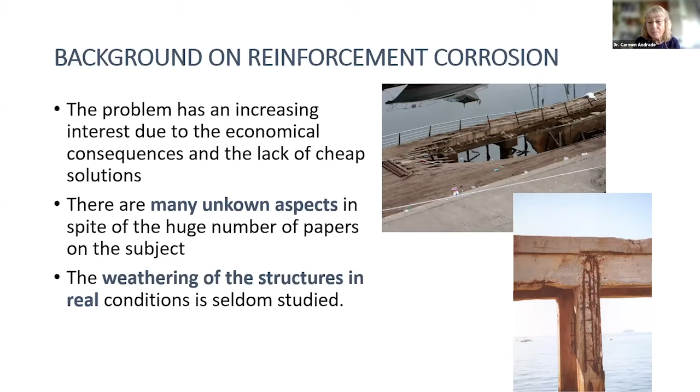Coming back, it has to be mentioned that it was in the 60s or 70s that Pourbaix and Gouda, Monfore, Baumel, Engell, Kaesche, these pioneer people, were studying corrosion. It's not new, despite a lot of young people just dealing with it now. It comes from very, very old, with very good papers at that moment.

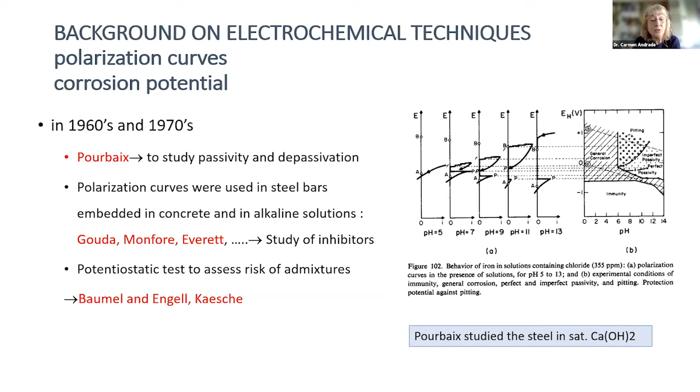They studied it at the beginning through polarization curves, either potentiodynamic, galvanostatic, or potentiostatic, in order to know the concentration of chloride that could develop corrosion.

In my thesis, I was addressing the application of linear polarization resistance, and there I can mention Feliu and Gonzalez, who were also masters of David Bastidas, and who suggested to me to try to apply this to concrete. This is the galvanostat, a handmade galvanostat that we made just for the experiments.

I used 2-meter-long pre-stressed steels, one bar or wire for working and the other for counter, and I was applying galvanostatic pulses in order to see whether the response is linear or not.

In that case, I used different amounts of current and different time steps waiting, in order to realize whether it's linear or not. And it's quasi-linear really. I was plotting the different RP values, and we realized they correlate very well to the state of corrosion of the bars inside these beams, some of which were made with calcium chloride.

After that, we extended this to any kind of media, and we also developed a portable corrosion rate meter together with the people I mentioned before.

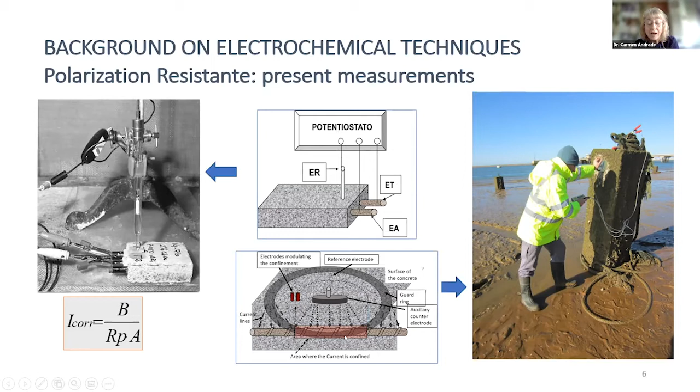We used a guard ring to confine the current inside a certain area, in order to have very well delimited the area that we are polarizing.

At that time, I was starting to apply this to concrete or mortar specimens, changing the amount of water, because aqueous corrosion needs water. We realized we have big changes when we go to 100% relative humidity or partial immersion, and when it dries, the corrosion rate is smaller, and the same happens with the potential.

We stated that the mechanism or control of corrosion in concrete can be an activation control, but also mainly a resistance control. This goes back to very old experiments.

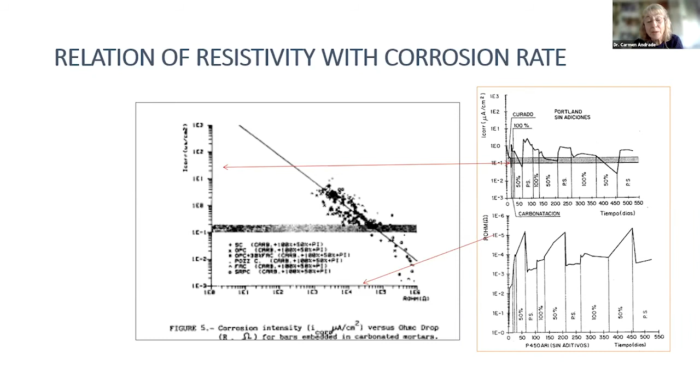We did that in many cases with chlorides and inhibitors, and together with Gonzalez we were able to plot this graph showing corrosion rate versus the ohmic resistance of the mortar. We realized this resistance control we were commenting on, using several types of cements and several types of additions.

We were also stating the levels of corrosion rate you can find as a function of the amount of water in the concrete, and what is passive state. When we have less than 0.1 micron per square centimeter of corrosion, we can say we are in passive state, or the corrosion is negligible because the concrete is dry. The maximum corrosion rate we were able to measure is about 1 millimeter per year.

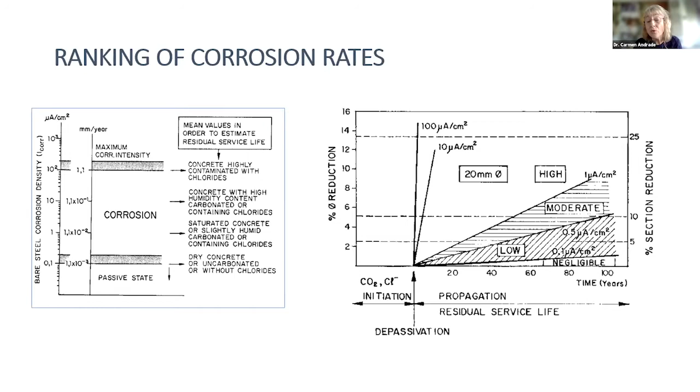We ranked that and applied it to this model, establishing that below 0.1 micron per square centimeter corrosion is negligible, because in 100 years there will be almost no loss in the steel section. We ranked up to 0.5 or 1 micron per square centimeter, and above 1 micron we can consider it very high corrosion, because important loss in the diameter or section of the bar would occur before the 50 years of service life normally considered for buildings. That ranking was made just based on this figure.

But I realized later this is not enough, because all the data were laboratory data. What happens if we expose that to the atmosphere? The values are the same ranking, but the effect of changing natural conditions, the relative humidity and the water, is very different.

I will try to summarize. We made big elements with holes in them where we were measuring the relative humidity. We call it the internal relative humidity, because we measure inside the concrete, in a small cavity, rather than in the atmosphere. We were measuring the corrosion rate with our portable corrosion rate meter, following the potential and corrosion rate, and we realized it changes very much with the climate, with external conditions.

We tried to analyze this further. The relative humidity values plotted here show that externally the humidity is lowering and going up - we have the daily change in relative humidity and the seasonal change in relative humidity. But inside the concrete, the relative humidity is much higher than externally, even during the very dry periods we have in summer in Madrid.

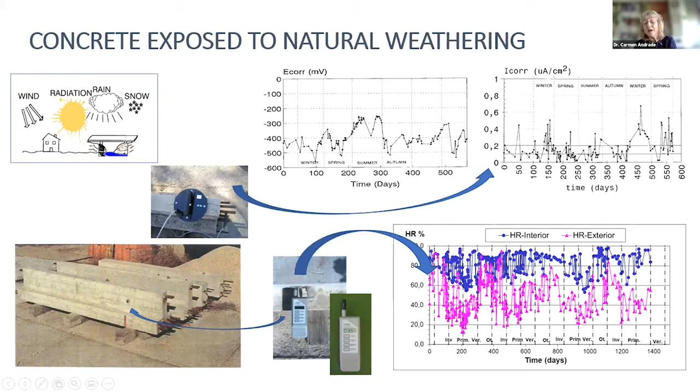When we compared that with the temperature, we realized the humidity moves in an opposite, mirror manner to the external relative humidity. While the temperature inside and outside the concrete is very similar, the relative humidity, as I said, is completely different - it's much wetter inside.

This wasn't the first time this was published, because researchers from Sweden, Fagerlund and others, were also studying this, and they had realized by other means this sponge effect of the concrete. The concrete retains humidity much longer than when drying.

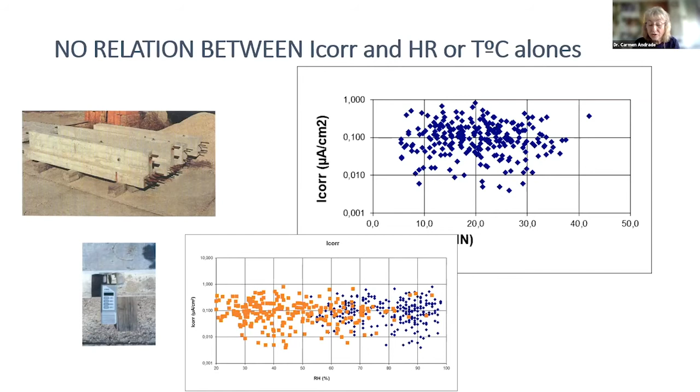When we plotted the corrosion rate versus the internal relative humidity, we didn't find any relation - there is not a direct relation. Also with temperature - this is temperature and this is the relative humidity inside. In that case, it's not the relative humidity that is controlling the corrosion rate, as some people think. No, it's not the relative humidity controlling the corrosion rate.

We produced other kinds of specimens, smaller ones, to handle them much better, with this cavity where we measure internal relative humidity, and we exposed them to different conditions inside the buildings or outside, protected from rain or exposed to rain and also to the sun.

This is a summary of two years of record. Now we have a much longer record, and we were measuring in the atmosphere the relative temperature, the relative humidity, and also the raining regimes, which we noticed is a very key parameter for the relative humidity inside, the amount of rain that is just fed into the concrete.

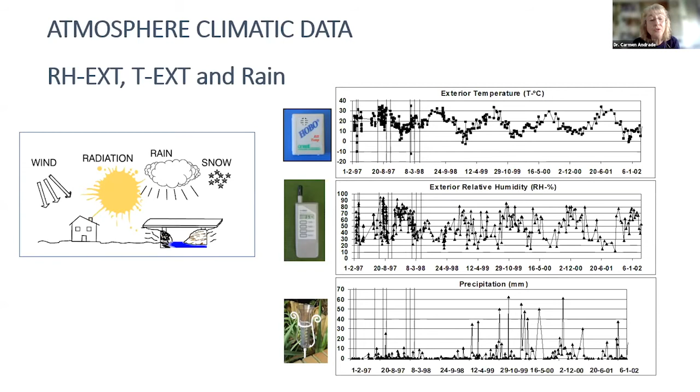If we look at what happens inside the concrete, we weigh the specimens to get the amount of water retained in the concrete. We see the daily and seasonal changes follow similarly in shelter and non-shelter conditions. Also the relative humidity inside is very similar in shelter conditions, not exposed to rain, versus those exposed to rain. But the weight is completely different.

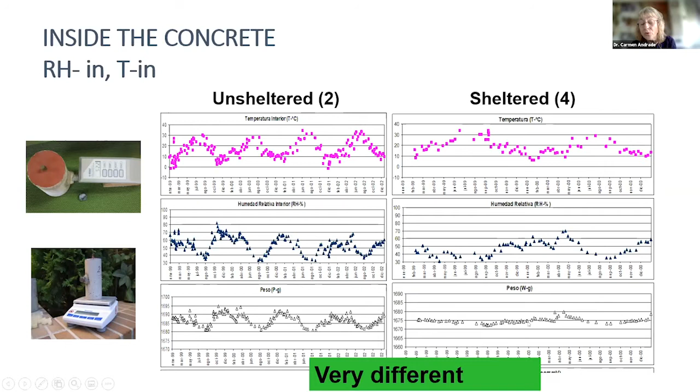The weight in the case of exposure to rain is much higher, and the changes are much higher than inside. Inside the concrete, if it's not raining directly, although the relative humidity is very similar to the outside, the amount of liquid water we have inside is much smaller. This is explained here - it's much larger when exposed.

In that case, the corrosion parameters follow this effect. Here we simply show that when we talk about the instantaneous corrosion rate, it changes a lot. But if we integrate to get the accumulated corrosion, it follows this typical diagram - the degree of damage is increasing depending on the seasons and the amount of rain, but it's continuously increasing the amount of loss of diameter.

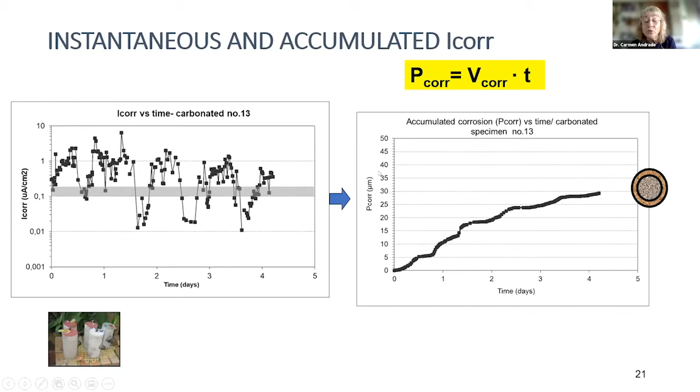And the interpretation - I've shown that, and it's known, that the relative humidity daily follows a mirror performance with respect to the temperature. That's because relative humidity is relative to the total amount of humidity. The key parameter is the amount of vapor in a cubic meter of air. Relative humidity depends on how filled with vapor that cubic meter is, which depends on temperature. When we lower temperature, we have higher relative humidity, and the opposite. This is the daily cycle of relative humidity.

And in the case of concrete, when it gets wet due to rain, we have a gradient from the exterior to the interior. When it's raining, it takes 2 or 3 days - in our case with 3 centimeters of cover, 2 or 3 days or even longer - for this external water to reach the bar by capillarity. If it's raining and you measure the corrosion rate immediately, the bar isn't noticing anything.

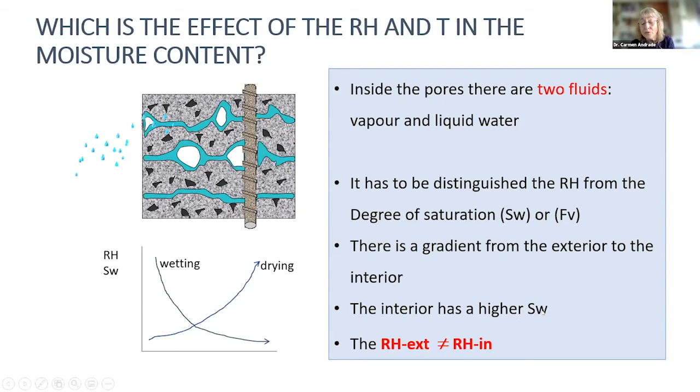But here is the summary. Inside the pores there are two fluids: one is vapor, the water vapor, and the other is liquid water. We have to distinguish the relative humidity, which is the amount of vapor in the atmosphere, from the degree of saturation or volumetric fraction. And there is a gradient - in the interior the degree of saturation is higher, and externally and internally they have different relative humidity.

And we had to produce this model, which we call the equivalent pore model, in order to interpret what is happening in the cavity and in the pores of the concrete. If we imagine the capillary pores - because the gel pores sometimes don't exchange water, you need liquid water to introduce water into the gel pores - but the capillary pores are those that exchange the water.

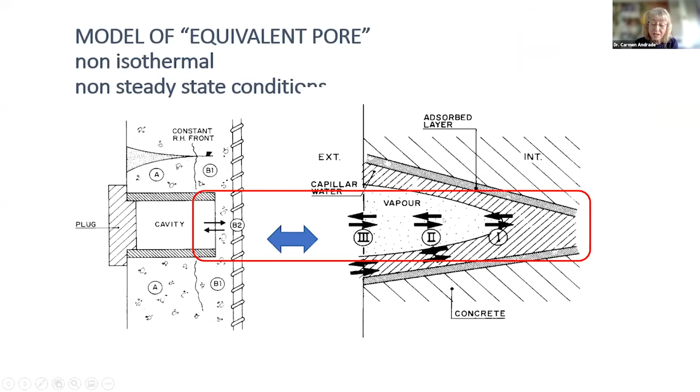In the capillary pores, we have this layer of water on the pore walls, and we have these two liquids, the vapor and the liquid water, exchanging by capillarity and by raining. In that case, we have this gradient that was well identified by our Swedish colleagues, and we interpret that in the bottom of the cavity, because we isolate the walls of the cavity and we have the change only here, we can say that the relative humidity here is the same that we have in the pore. With that, we were able to interpret what happens, because we could follow the changes we notice with the corrosion parameters.

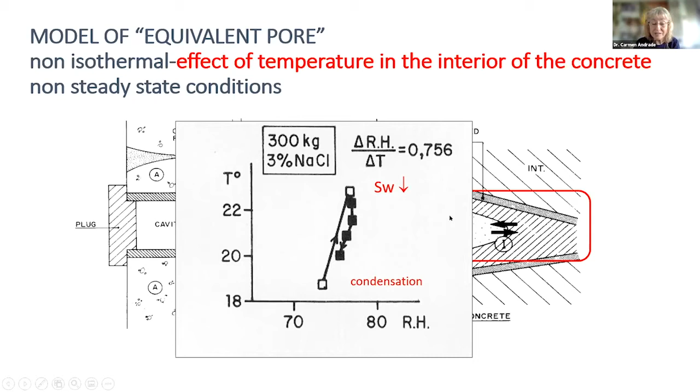One interesting thing is that inside the pore, if I increase the temperature and I am not at the surface, the relative humidity increases because the liquid water evaporates. During the morning, temperature increases until mid-time, and during the afternoon, the temperature decreases. In that case, I condensate. During the temperature increase, there is a decrease of the saturation degree, and during the lowering of the temperature, there is condensation. This is a complete cycle, both daily and seasonal.

Again, these are the daily cycles exterior, interpreted as day and night, but inside the concrete what happens is different, because when we increase temperature, we increase relative humidity, we don't decrease, because there is no relation to the exterior. So in that case, inside the concrete it is reversed compared to what happens outside in the atmosphere.

We plotted what is called the retention curves, meaning the degree of saturation versus the relative humidity, and they are theoretical isotherms, but as we are not isothermal, we are in a completely non-steady state change. What happens inside the concrete is shown here, because we go from low temperatures to high temperatures, and this is more or less what happens inside. We can frame them with the theoretical isotherms, but we don't have an isothermal process. We have a non-isothermal process.

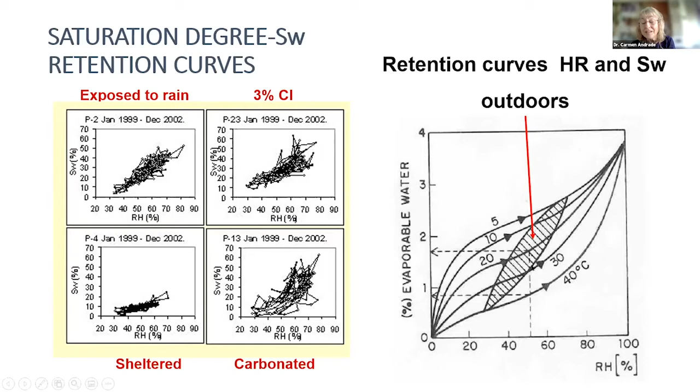In that case, temperature is a key parameter when we have concrete in the open atmosphere. This has been plotted and studied by our colleagues working with atmospheric corrosion.

When you increase the temperature, you have evaporation, and after some time there is a decrease because you have evaporated completely the water. In that case, at the beginning of the temperature increase, there is an increase of the corrosion rate, but afterward there is a decrease. That is why it is so complex to interpret what is happening here, because we have the skin and the interior, and this is a continuous opposite process that makes modeling very difficult.

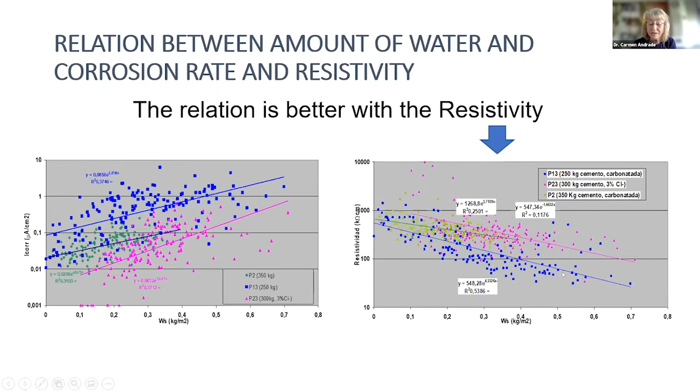We tried to plot the relation between corrosion rate and amount of water inside, and there are trends with a normal scatter, because there are different temperatures, and also differences between the skin and the interior. The resistivity is the opposite - it decreases when you increase the amount of water inside the concrete. With these values, we plotted again our graph of corrosion rate versus resistivity, and we found that the trend is clear, although there is a big scatter.

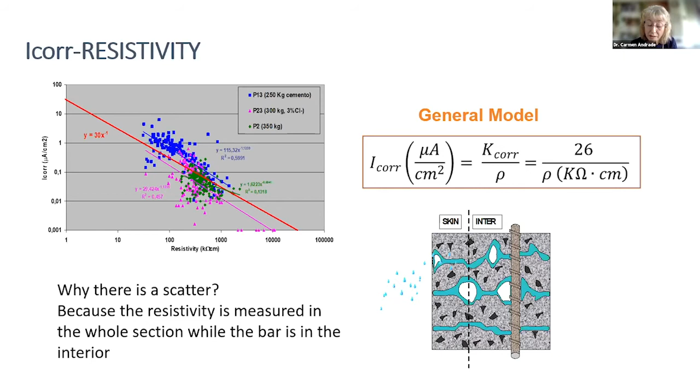Of course, if the steel is passive, meaning not in active condition, this is much more flat, because the corrosion rate does not go above 0.1. In that case, this is clear for active corrosion, but not for passive state. Why the scatter? Again, because we measure resistivity in the whole volume, while the corrosion rate is just near the bar. So there has to be an average of the resistivity that is not the same average that we measure in the bar. In any case, we have this equation that we derived from the previous lab experiments, and that is confirmed, we think, after many years of measuring.

As a conclusion, the relative humidity is not the same as the volumetric fraction or the saturation degree. There are two different fluids inside the concrete, and therefore the corrosion rate is not a function of the relative humidity. The temperature has two opposite effects: it increases the corrosion rate, but as it evaporates the water, it decreases the corrosion rate. It depends on the moment and how fast the temperature changes whether you get one or the other opposite effect.

The rain has a crucial effect on the saturation degree, and with the same relative humidity, there are several saturation degrees. The corrosion rate and the resistivity have an opposite trend, and there is a resistance control in the concrete. From this, we have empirical relations that express the corrosion rate as a function of resistivity, but also as a function of the volumetric fraction.

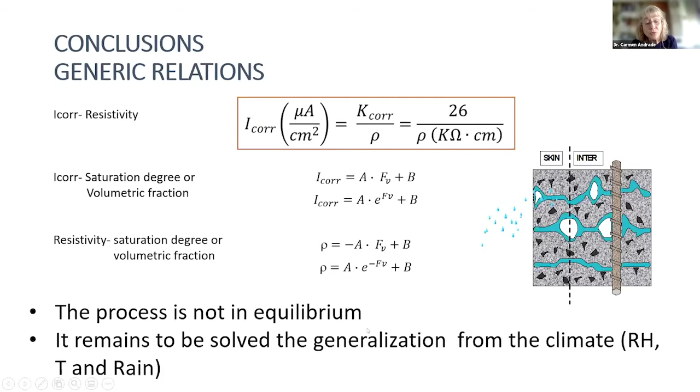It can be linear or exponential. Both have a poor correlation factor, but in any case, a correlation exists, and the same between the resistivity and the saturation degree or the volumetric fraction. The key point is that we are out of equilibrium, and it remains to be solved a generalization of this effect. Thank you very much for your attention.

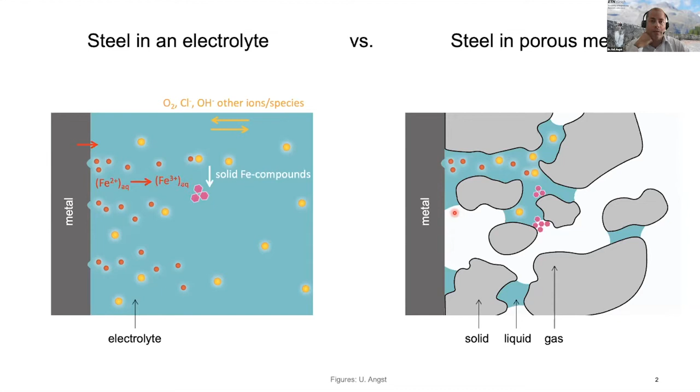Now, this has major implications for understanding corrosion of steel in concrete, and some of those points I will make today have already been touched upon by the previous presentation of Carmen. But I would like to first talk about corrosion of steel in chloride-induced or chloride exposure environments. Then in my second part of the presentation, I will talk about carbonation-induced corrosion of steel in concrete.

So when it comes to initiation of corrosion in concrete in the presence of chlorides, it is very well known from previous studies, such as the famous work by Hausmann, who revealed a critical chloride hydroxyl ion ratio, or the work from other important researchers in the 70s, that we have this ratio, chloride to hydroxyl ions, which is important for the tolerable amount of chlorides in the solution before we get corrosion.

So what we did is we took samples from engineering structures. You can see here reinforced concrete cores, these cores have a diameter of 150 millimeters. They contain a piece of reinforcing steel, which at the time of sampling was not corroding. Those samples were exposed to cyclic wetting and drying in chloride solution in the laboratory until corrosion initiated, which allowed us to determine the chloride threshold value or critical chloride content, here abbreviated C-crit.

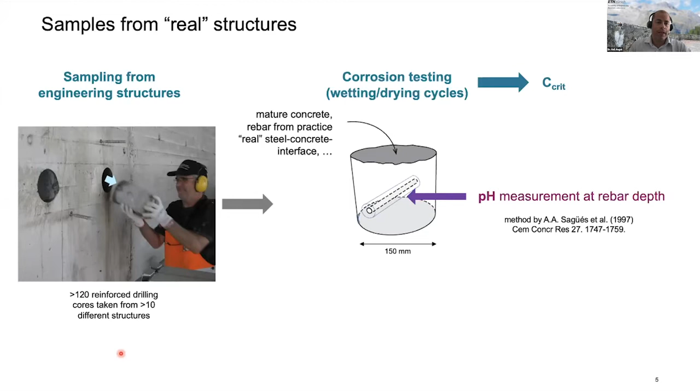So when we now compare the critical chloride concentrations from these cores, taken from 120 cores from about 10 different structures, and we compare the pH and the critical chloride concentration, this is the type of result we get.

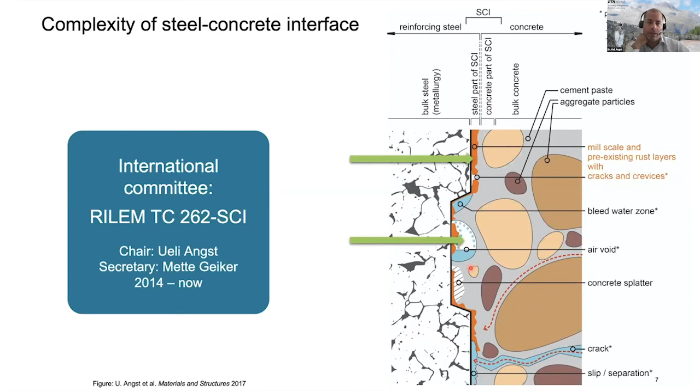With the exception of one or two studies, there seems to be general agreement that the presence of mill scale and rust layers actually have a negative effect, which may be explained by a mechanism similar to crevice corrosion, a mechanism that Burkan Isgor and colleagues, who will also present later after me today, proposed. This is based on the mill scale being cracked and having crack and crevice-like geometries, so corrosion initiation in that case may be due to a similar mechanism as crevice corrosion.

Now, moving on to the effect of interfacial air voids, there is a lot of literature that indicates that corrosion in concrete tends to initiate preferably at interfacial air voids. There is one very famous, well-known figure in the literature, produced by Glass and Reddy in the year 2002, which shows that with an increasing amount of interfacial air voids, the chloride threshold value decreases.

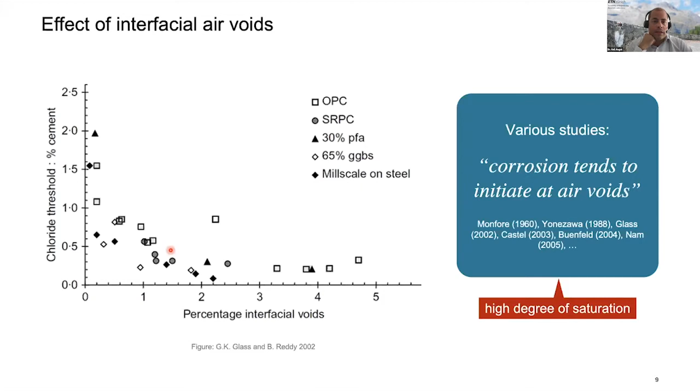One particular aspect of all these studies is that they were performed at a relatively high degree of pore saturation of the porous matrix that surrounds the steel. When we look at conditions with a lower degree of saturation, we observe a slightly different case. That brought us in this RILEM technical committee to the following hypothesis on the role of moisture in triggering corrosion of steel in concrete in the presence of chlorides.

So this in general reveals the importance of moisture and the degree of saturation exactly at the steel-concrete interface in triggering chloride-induced corrosion of steel in concrete.

Now I would like to move on and spend a few minutes on corrosion of steel in carbonated concrete, which is a very different process, but again here the interfacial zone of steel and concrete plays an important role. Steel in concrete is well known to be protected against corrosion because it is passive at very high pH. But when the concrete carbonates, the alkalinity is lost so that the pH actually decreases, and that may increase the risk of depassivation and then later on corrosion.

This was very early also experimentally demonstrated in experiments in Japan. Hamada reported in 1968, but actually the experiments were done much earlier than that, so they are almost 100 years old, where steel bars or steel electrodes were immersed in different electrolytes that simulated concrete in alkaline condition, pH 12, or in an increasing degree of carbonation with increasingly lower pH values. The potential measured over time clearly indicated that when we decrease the pH towards values around 8, 9 or so in those simulated systems, corrosion initiated.

So we were wondering, again in another RILEM Technical Committee, if this also is the case in concrete, and we looked at data from inspections of real structures. All the structures we considered in the evaluation were structures where the carbonation depth had exceeded the cover depth, meaning the steel that was inspected had been in carbonated concrete for quite some time at the time of inspection. Despite this, the majority of cases of those structures did not really show significant corrosion damage.

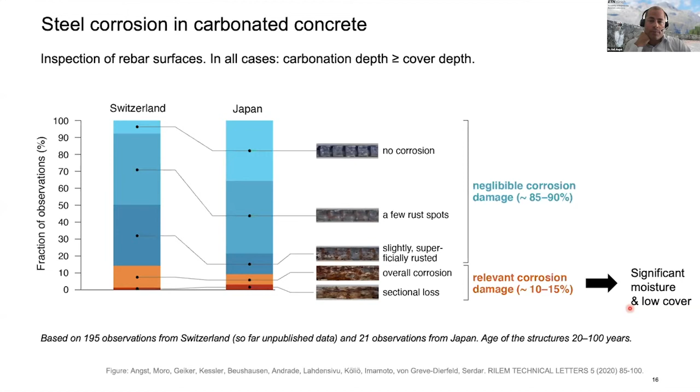When we further looked at these data, it was very clear that relevant corrosion damage only occurred when there was significant moisture exposure, such as issues with drainage, wrong drainage systems on facade elements or balcony slabs, and so on, in combination with low cover depth. So again, the moisture seems to be very important, and I think that also clearly became apparent from the talk that Carmen gave before me.

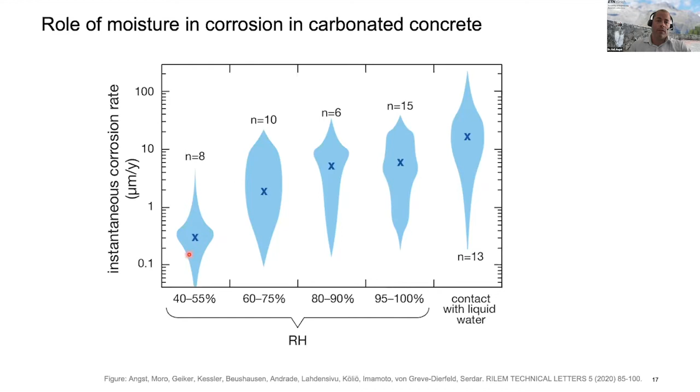So what controls the corrosion rate of steel in concrete? It's really the question, what is the rate limiting step here? Again, if we rely back on an understanding of steel corrosion in electrolytes, then often one rate limiting factor is known to be oxygen diffusion towards the metal surface, which is represented by the oxygen diffusion limited current density.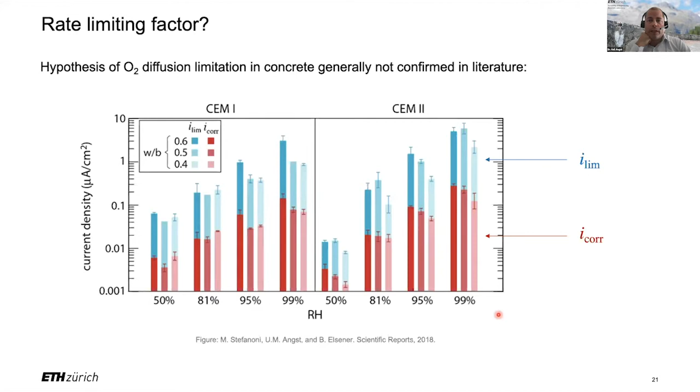So what else can be used to describe and quantify the corrosion rate in concrete as a function of the relative humidity or moisture state in general? To understand that, there is the theory of a size effect, actually an area effect.

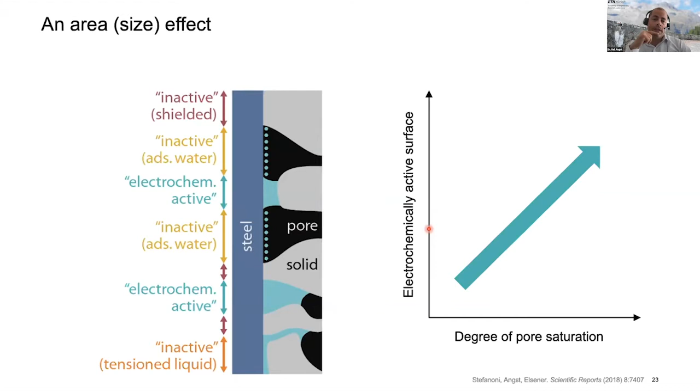Again, the steel is in contact with solid phases and with pore space, and some of the pore space may be filled with liquid and some not. Of course, if we increase the amount of surface where we have a bulk liquid electrolyte present, which we do by increasing the degree of pore saturation, we can increase that area. That means an increase in electrochemically active surface area, and therefore also an increase in apparent macroscopic corrosion current density.

This can be quantified by using the theory of capillary condensation, which relates the radius of stably water-filled pores to the relative humidity, and that can be used to quantify the electrochemically active surface area fraction. So it is the pore structure at the very interface, together with the exposure moisture condition, that determines this surface area on which corrosion occurs. That is just an area effect that plays into the apparent overall corrosion current density.

In addition to that, there is also an electrochemical effect, because the pore structure influences the degree or extent to which the ferrous ions in the electrolyte can move away, and that controls the concentration of Fe2+ at the steel surface, which then has an electrochemical effect on the corrosion kinetics.

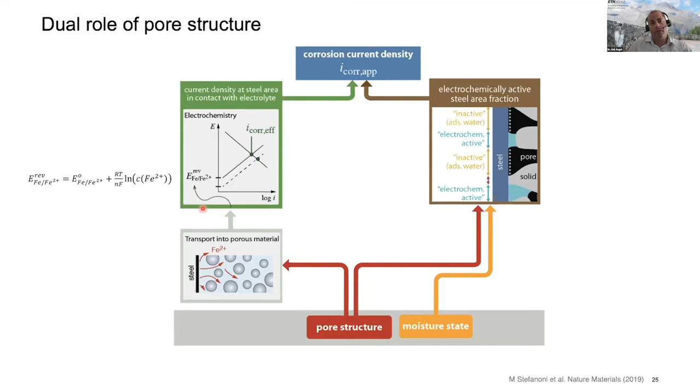In addition to chemical influences of the electrolyte present at the metal, physical effects also play a role, in particular the amount of water held in the pore system. So to better understand all of this, there is a need to better characterize the microstructure of this interfacial zone, and we have to consider the local, very pronounced local heterogeneities at the steel-concrete interface.

With this, I am at the end of my presentation, and I would like to thank you for your kind attention.

Thank you so much, Ueli, for a beautiful presentation and all of those mechanisms inside.

We all know that there's still a lot of work to do to disentangle all these differences and the combination of chloride and carbonation.

So I think now it's time for questions.

Professor Romero Castaneda from Texas A&M has a question. Yes, I have a question. Thank you for the very nice presentation, Ueli. So the question is regarding your final statement or conclusion based on the oxygen and area.

You mentioned that oxygen, you didn't see, is a controlling step process. And also you mentioned that maybe, if I understand correctly, the area that I call the active area could be more influential in the corrosion rate. So is there any mathematical tool that allows us to distinguish this or to have a pattern to make this distinction? Because that's very important.

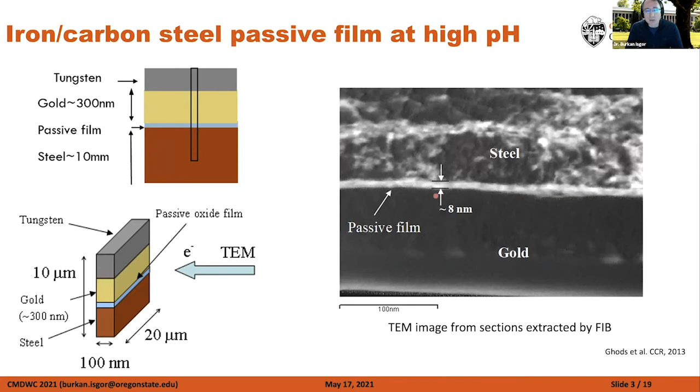You can characterize this further using TEM. If you look at dark field images and tilt the sample to see what kind of images you get, you actually see that the passive film is formed of nanocrystalline particles. These are different angles of looking at the passive film, and that shows us there's a crystalline structure there.

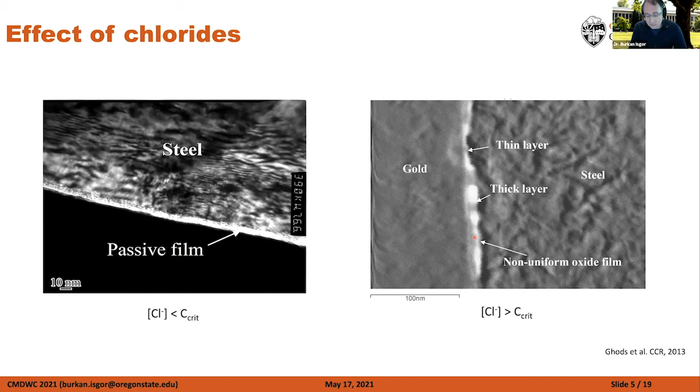Now, our topic today is more about what happens to that passive film when you add chlorides. We always talk about this critical chloride threshold concept, and theoretically there is actually a reality to that. If you add chloride into the pore solution where you passivated those systems and keep the chloride concentration low, you don't see damage on the passive film. But when you exceed a critical chloride content, you start seeing damage on the passive film. So there is an actual concept of critical chloride threshold. There's a big debate about how practical that is or whether it's useful, but theoretically, from theoretical discussions, we can say that a critical chloride threshold does exist.

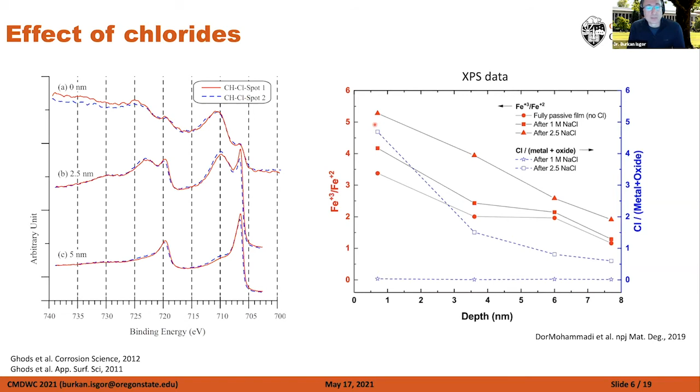So when you add chlorides, what happens is that the Fe3 to Fe2 oxide ratio deep inside the passive film, near the interface between the metal and the passive film, doesn't change much, but the Fe3 concentration actually increases with chloride addition near the surface. This is also something that has been seen in other people's work as well - the Fe2 oxides basically become less dominant at the outer surfaces as chloride increases.

Some people show a different way of passive film destruction, but at the end of the day, this whole model is based on the implication that chlorides need to diffuse into the passive film. There is another approach in which the chlorides are not necessarily diffusing into the passive film, but actually creating iron defects, iron vacancies, and those vacancies diffuse and create a defect structure at the metal and passive film interface. Again, testing these are difficult.

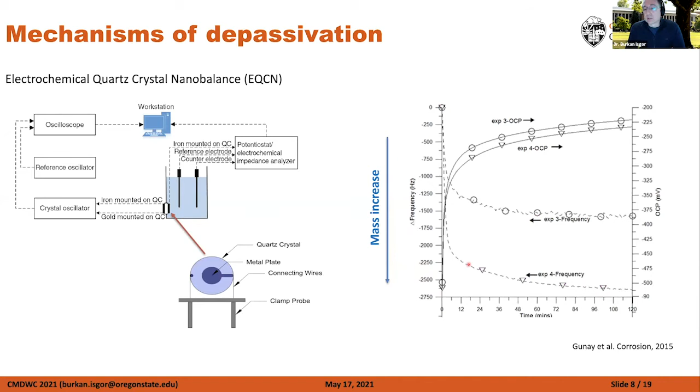Now, when you start adding chlorides, this is the data I just showed you, this purple line here and OCP line here. At one point, when you start adding chlorides, you see something very interesting. There's a sharp slope change occurring in the frequency, and this is actually corresponding to a mass increase.

At the time, we tried to interpret this, maybe overinterpret this, I have to admit, as to what might be happening to the passive film. This mass increase right after chloride addition and before any pitting starts, we interpreted as adsorption of the chlorides on the surface of the passive film.

Now, this paper was reviewed by three reviewers. One reviewer agreed with us. The second reviewer said that mass increase was probably due to corrosion product formation. We were able to show that was not the case, but the third reviewer said that mass increase is likely because of chloride ingress into the passive film. So you can see, even in one paper with very simple, over-explained data, there was some controversy.

At the end of the day, we were able to make all the reviewers happy by writing this sentence: another hypothesis for the gradual mass gain observed is adsorption, possibly followed by chloride ingress. But at the end of the day, I personally was not happy with where we were.

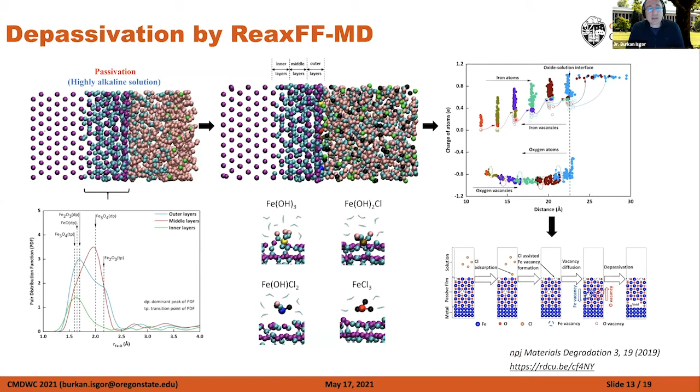And we did not see any chlorides penetrating into the passive film in these simulations. As you look at the pair distribution functions, you also confirm that shift from Fe2 to Fe3 structure as well, which was also very useful.

Now, this is the only slide from DFT. As I said, DFT is very good at answering surgical questions. We asked many questions in DFT, but today I'm going to show you just this slide. We asked whether those four steps that I mentioned - where local acidification occurs, then some chlorides adsorb, and then some chloride compounds form and dissociate from the surface - are they thermodynamically feasible?

DFT is very good at answering these kinds of questions. You can look at different things like reaction energies - a negative reaction energy means the process is feasible. You can look at the bond lengths - the longer the bond length means the system is stretched longer. You can look at iron vacancy formation energies - the lower the energy, the more tendency for vacancies to form. So DFT simulations all confirm thermodynamically that what I showed you in molecular dynamics simulations were also correct, or I shouldn't say correct, but they supported each other basically.

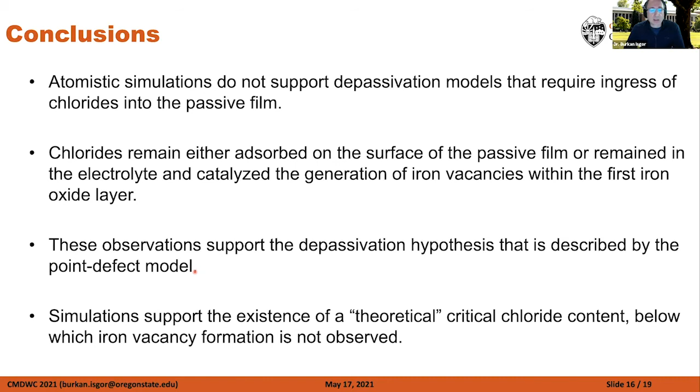We showed a lot of things like the theoretical critical chloride content, the role of pH, and the role of chloride content, and at the end of the day we were pretty happy with where we are.

Now, I always get this question: why all this? Why do we need to study all these things? I actually think it's a very valid question, I don't dismiss these questions. There is a practical aspect of corrosion research, and there is a scientific theoretical aspect of corrosion research. Personally I always think more science is good, the more we can actually be useful practically. But there is, I think, a practical aspect of this as well.

Understanding passivation and chloride-induced depassivation processes at the atomic scale might be useful in the future for developing custom-designed corrosion inhibitors and corrosion resistant alloys. Our work is going in that direction - we're trying to work on those two aspects, trying to get something practical out of this. So when you understand how chlorides work, maybe you can develop certain things to prevent those processes, maybe block some of the catalytic processes. Things like that might have some long-term practical implications.

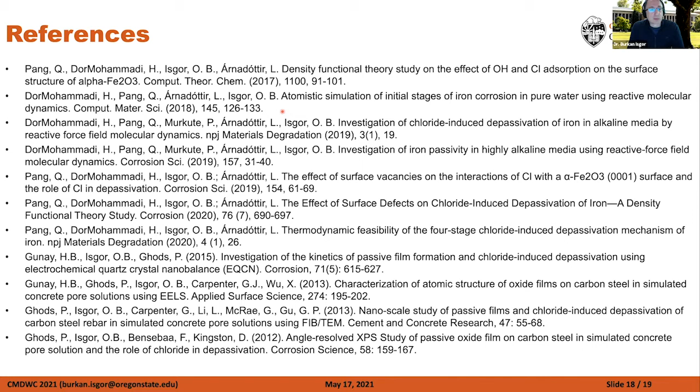As I said, there were a lot of papers that covered this research that I present over 15 years, and I really appreciate your time and patience with me.

Thank you so much, Burkan, for beautiful and very complete presentation. Of course, more science makes you healthy, and I saw a lot of science in your presentation. You very well managed all the thermodynamic transport and reaction, what makes good, and thank you for the mechanisms and the computer-aided results. So before I move to some of my comments, I'll let you take a Carmen question.

Probably, Carmen, you can go ahead live and ask Burkan. Thank you, David. Well, many thanks for your very interesting presentation, Burkan.

My point is about the water molecule, because I didn't see it, and I think that it plays an important role. Yeah, there are water molecules here, Carmen. Maybe I didn't show it, but you see the oxygen, hydrogen - the actual electrolyte is a water-based electrolyte. Yeah, okay, in that case you take into account - sorry, because it was very quick on that. Well, I appreciate very much your presentation.

Okay, thank you. So I got some comments. First, I think I'd like to credit Professor D.D. Macdonald for the point defect model. So we all know that he is the one, the one and only, by the way, and point defect model is D.B.'s. So we are now working on a different model because we are intrigued about the electrochemical activity coefficient.

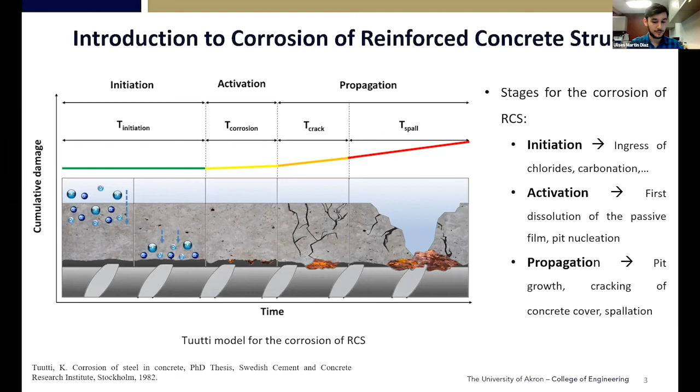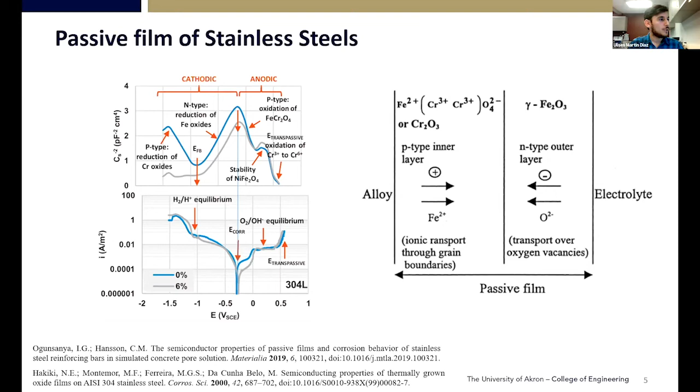So by the Mott-Schottky theory, if the potential on our rebar is above the flat band potential, the passive film will have this double layer of chromium and iron oxide, having the P-type and N-type respectively. However, if we are below this flat band potential, only the chromium oxide will be formed.

As we can see by this Auger study on the right, where they study the 304 alloy in concrete pore solution, we see that in fact the iron and nickel oxide are the ones on the outer surface, and the interface between the alloy and the passive film is mainly formed of chromium oxide.

This is very interesting. However, most of the studies up to date are not with real concrete. Usually they use simulated solutions, and they don't use rebar from construction materials, or the exposure times are very short. Hence, we decided to carry out a study with OPC Portland cement with 3 different stainless steel grades, 2 lean duplex, paying more attention to the 2001 lean duplex stainless steel, which has a very low nickel content, and subjected to a long exposure to 4 different chloride concentrations.

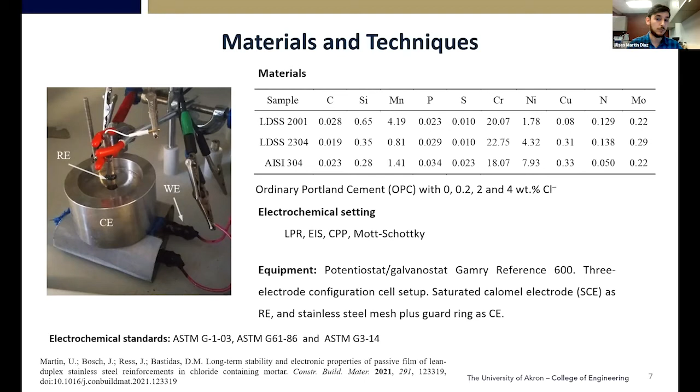First of all, we had the Icorr and Ecorr monitoring over 2.5 years of exposure. As we can see, we selected both extremes, the 0 and 4% weight of chloride. For the 0%, we had the highest, most noble potential for all 3 alloys, stabilizing and reflecting in lower, stable current densities. However, when the chlorides were added, this stabilization happened at lower potential, so more active, with a difference of about 100 to 80 millivolts compared to the non-chloride samples.

This was also reflected in a higher current density. However, all 3 stainless steels were far below the limit for low corrosion by the standard, which was 0.1 microampere per centimeter squared, showing the good protection over this long exposure time for all 3 stainless steels.

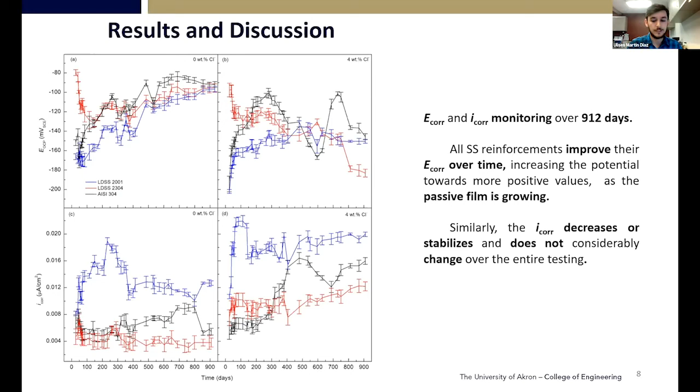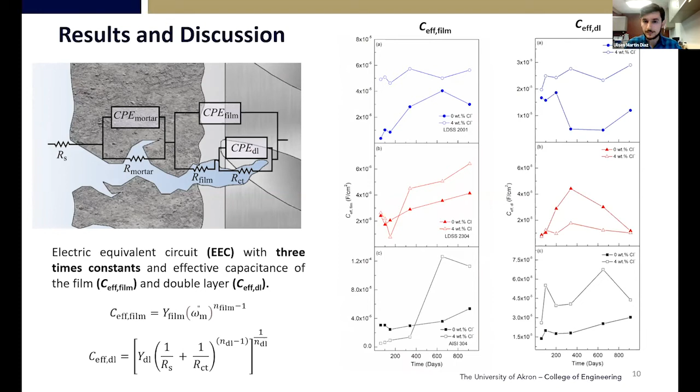As it can be seen, most of the effective capacitance increased with the amount of chloride in the concrete, which could then be related to the passive film thickness by the equation here. Interestingly, the lean duplex stainless steel showed the thickest values of the double layer, even at 4 weight % chloride, despite having the lower nickel content.

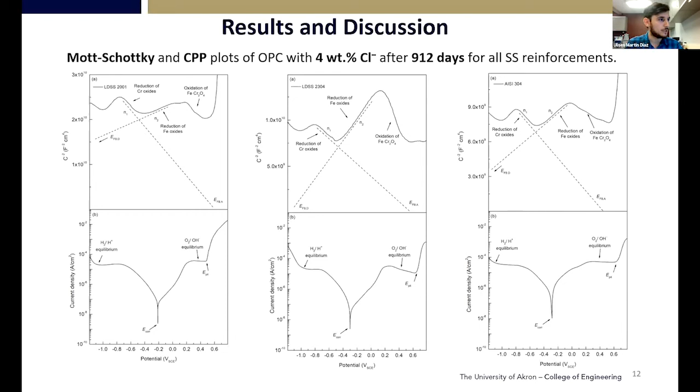Following with the semiconductor properties, we saw that all 3 stainless steels show the 3 typical peaks that we previously presented, with the reduction of chromium oxide, the iron oxide, and then the oxidation of the spinel and chromium. A more in-depth analysis using the Mott-Schottky plot was seen by the flat band of the acceptor and the donors, as well as the carrier density of the same.

It could be seen a similar trend with all 3 stainless steels, where the flat band of the acceptor increased toward higher potential as time went through, which showed that this higher potential meant that the chromium oxide was able to accept more electrons easier, meaning that as the passive film was growing, this corrosion protection increased. However, the flat band for the donor part was becoming more and more negative, meaning that the iron was also able to donate these electrons, becoming a more porous and more doped passive film.

The carrier density for the acceptor and donor constantly increased with the chloride content, which is seen in the literature. However, the acceptor of the lean duplex was the lowest of all 3, showing its outstanding corrosion protection.

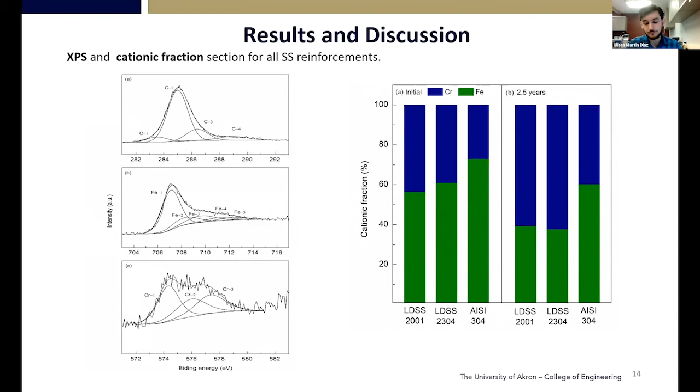So as a summary, over these 2.5 years exposure of the concrete samples for our 3 different stainless steels, we saw that all 3 stainless steels were able to stand way below the 0.1 microampere per centimeter square, proving their outstanding corrosion protection. We also saw that this duplex stainless steel was able to withstand the chloride amount and show no passivity breakdown over these 2.5 years because of the 100 kilo ohm centimeter square maintained throughout the entire testing.

Also, the lean duplex stainless steel, the 2001, was able to grow its chromium layer by 20% compared to only 10% for the austenitic stainless steel. And by the flat band potential, even though the donor was going towards more negative values, meaning that the iron layer was donating more electrons, the acceptor layer corresponding to the chromium was increasing its potential, meaning that it was absorbing more electrons and making a more stable and less doped passive film.

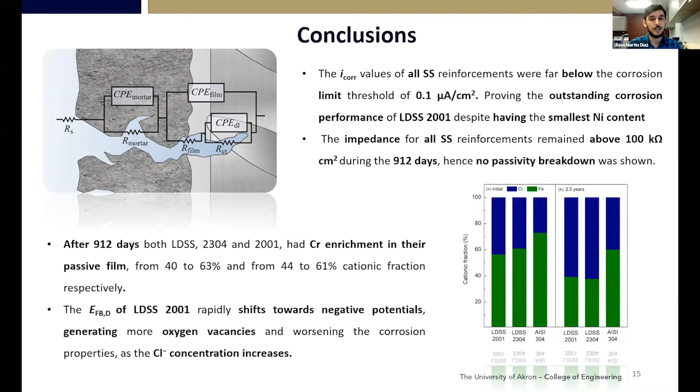Thank you for your time, and I'll be glad to answer any questions you may have.

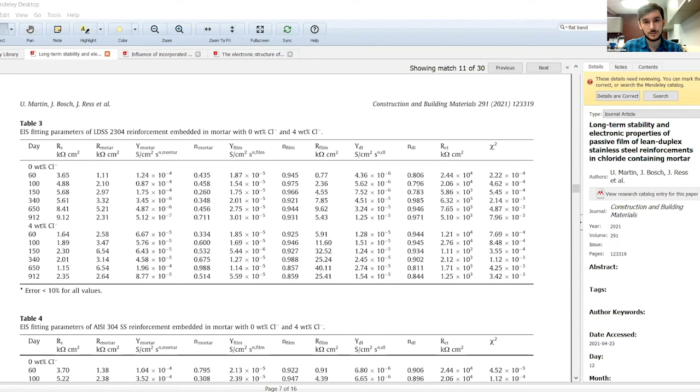Okay, thanks, because I was always wondering what the resistance of the film could be, and at least now we have an order of magnitude. Okay, thanks. Thank you. Thank you for the question. So if that is the case, thank you again, Ulises.

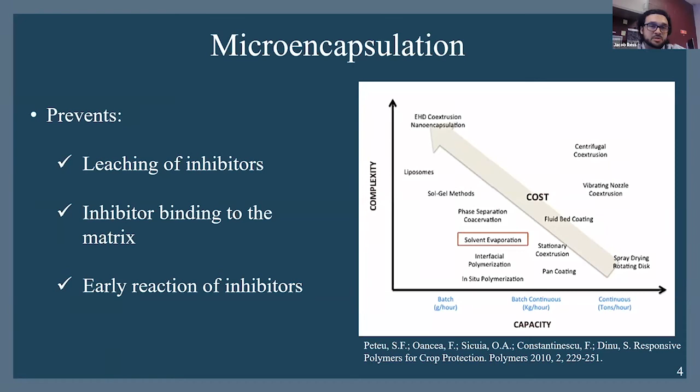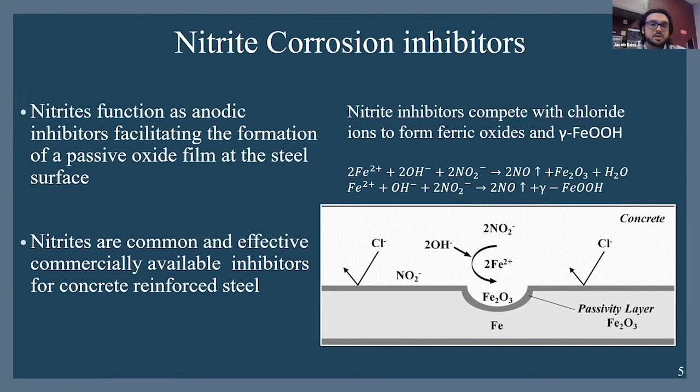Additionally, nitrite corrosion inhibitors are our inhibitors of choice, as they are one of the most well-known, most widely used, and very effective. What they do is compete with the chlorides to form the passive Fe2O3, ferric oxide, and oxyhydroxide layers on the surface that can protect against further corrosion.

To encapsulate these corrosion inhibitors, we wanted to use an environmentally friendly shell material. In previous research by Panda et al., colophony, or pine resin, has been used for delivery of drugs in a simulated human body environment. Research by Canovas et al. has shown that colophony pine resin itself can actually increase the mechanical properties of the concrete in terms of its compression and flexural forces.

To begin, the synthesis of the microcapsules was done using the solvent evaporation technique, as it is very cost effective, easily scalable, and rather simple.

By dissolving our colophony in the organic solvent ether, followed by stirring with the addition of our corrosion inhibitor aqueous mixture, and then finalizing with this double emulsion by adding an additional aqueous solution to form these shells with smaller vehicles of the inhibitors encapsulated, as shown in the diagram.

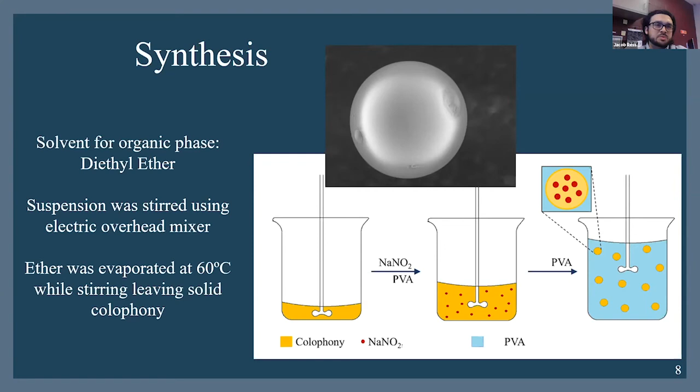In terms of the release for the microcapsule, the hypothesis was that because colophony has a pKa value of about 7.2, the abietic acid will be in its protonated form at pH values below this value, and deprotonated at pH values greater than 7.2.

To show this as the dominant release mechanism causing diffusion of our corrosion inhibitors from inside a microcapsule to outside, we tested with multiple pH solutions, including DI water around pH 6.8, carbonate bicarbonate buffer around pH 9.1, and a simulated concrete pore solution of saturated calcium hydroxide at pH 12.6, just to show the effect at pH below, near, and far above the pKa value.

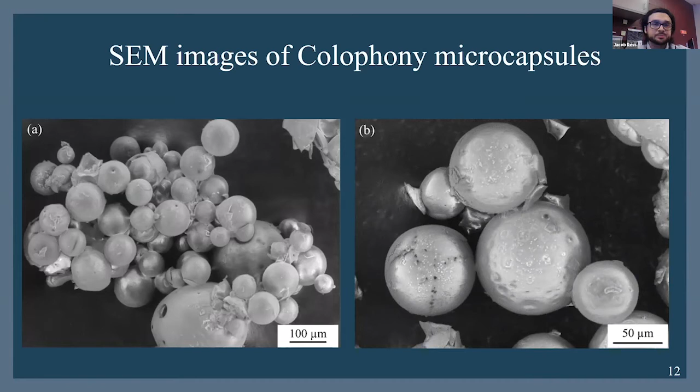This can also be beneficial to our system, as it shows that the colophony not only can encapsulate these corrosion inhibitors, but also has the effect of scavenging some oxygen molecules as well, and we see that in all of these solutions, we have this oxidation effect.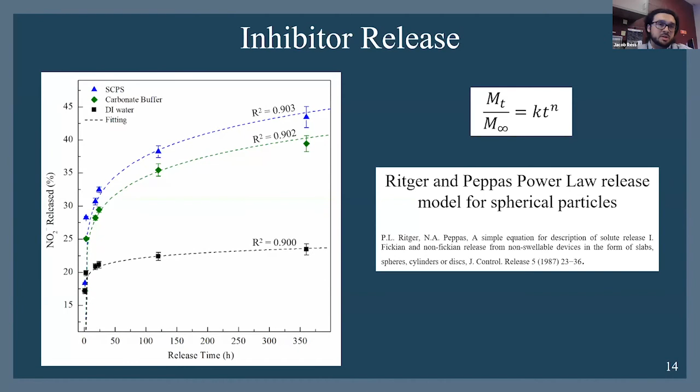the nitrite molecules to a dye to see with the UV-Vis, and it was found that the release was able to be modeled by the Ritger and Peppas power law release model for spherical particles, and we found good correlation there to be able to predict how much inhibitor we can release from these microcapsules over the long term.

In terms of the most important part, the polarization studies and the EIS studies to show the effectiveness of the microcapsules, they were exposed for 7 days in the different pH solutions to allow sufficient inhibitor to show a major inhibition effect. What we see, from left to right, is low to high pH. In blue we have all of our microcapsules, red are the free sodium nitrite inhibitors, non-encapsulated in the same system, and black is our control, all in a low chloride, 0.4 weight percent chloride solution - the maximum widely held amount of chloride allowed in concrete mortar or matrix.

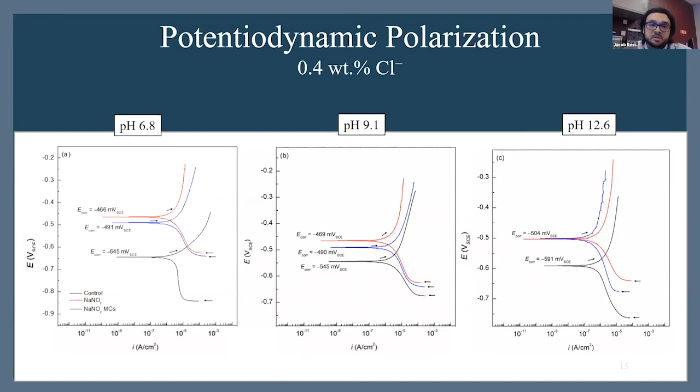We see that the microcapsules, although showing a more active E-corr in the near neutral and pH 9 solutions, do show similar corrosion current densities and values to our free inhibitor solution. Lastly, in our alkaline solution, our simulated concrete pore solution, we see the most ennoblement by the microcapsules, showing comparable E-corr values to our free inhibitors, as well as lower I-corr and lower current densities in general.

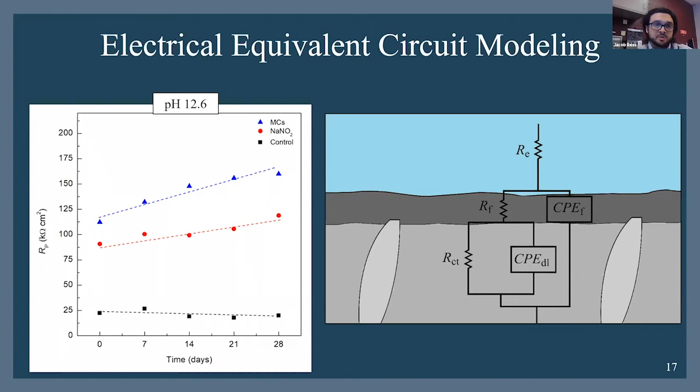On the left are calculated Rp values from the EIS for the simulated concrete pore solution, as that is the major focus, to see that the microcapsules, over a 30-day period, show polarization resistance values even higher than our free inhibitors, even with comparable nitrite concentrations, likely also attributed to any effects of the colophony, as well as the release of the corrosion inhibitors themselves.

able to withhold the corrosion inhibitor solutions. Then, as the pH of the concrete mixture increases, we have a release of our corrosion inhibitors, which will effectively be able to diminish the amount of any leaching and premature binding during the initial stages, and allow for more effective use of our inhibitors and less loss.

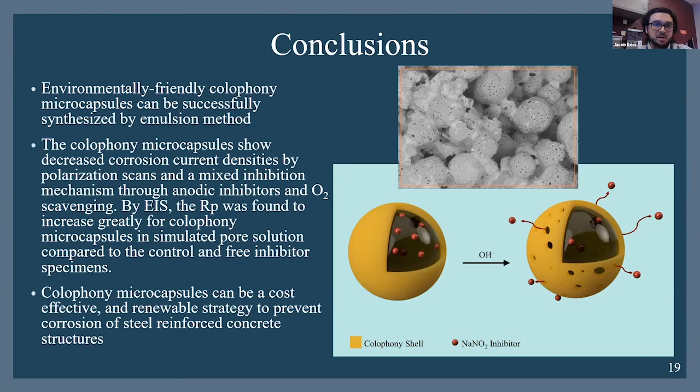Thank you, Jacob, for your presentation. We have a question from Sahed Jelinka. Sahed, do you want to go live and ask your question? Thank you for the presentation. My question is: what is the benefit of encapsulation? Why not directly add the inhibitor into the concrete, or the electrolyte you are working on?

That's a good question. These microcapsules have multiple benefits beyond just the free inhibitors. In the concrete environment, we see even greater performance in alkaline solutions. Previous studies by Canovas et al., which I cited at the beginning, show that adding colophony and pine resin into concrete mixtures can decrease water absorption, increase compression and flexural forces, and improve other mechanical properties. There's also a possible future study on the oxygen scavenging effect of colophony itself. All these effects together give greater effectiveness than just the free inhibitor alone.

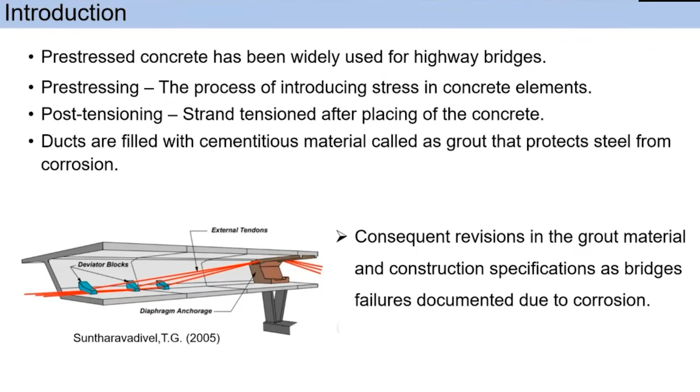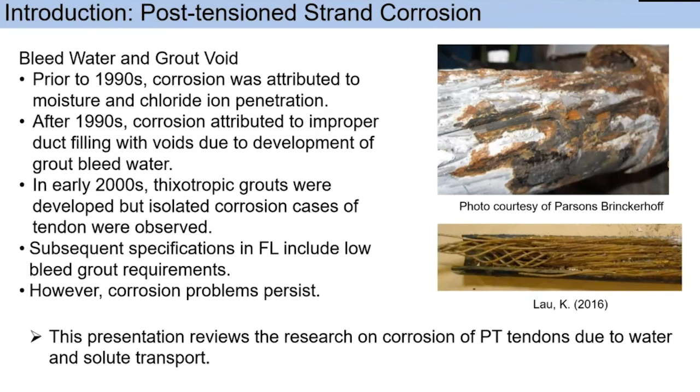Corrosion failure of tendons was identified in 2011 in a bridge in Florida after only 8 years of service. More than 10% of external tendons were replaced. In 2013, investigation of the cause showed that failure of post-tension tendons utilizing updated thixotropic grout products, this corrosion was not directly associated with grout voids, bleed water, or chloride, but the corrosion was related with physically and chemically deficient segregated grout, which is moisture rich with high concentration of sulfate and alkali ions.

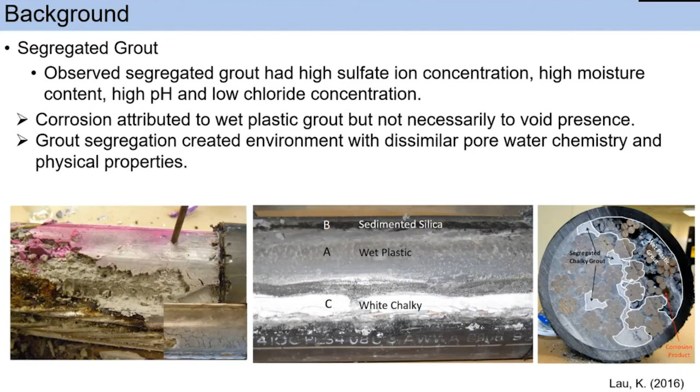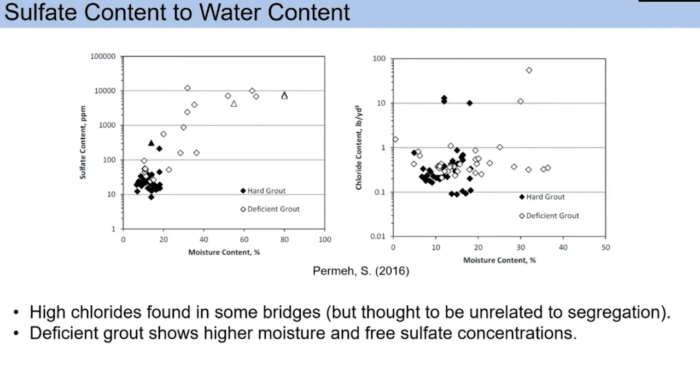As per research by Hamilton and Permeh, the top elevation showed that the moisture content was greater than 20% and sulfate level was elevated. These research efforts show that this stage setup can elevate the formation of deficient grout at the upper elevation of the tendon.

MIT can facilitate grout deficiency shown by differentiation in moisture from upper and lower elevation. These MIT samples were cast using excess amount of water as shown in the last slide. These are the results from moisture content and pH. Here we can see normally higher pH maintained in deficient grout. This is deficient and this is hardened grout.

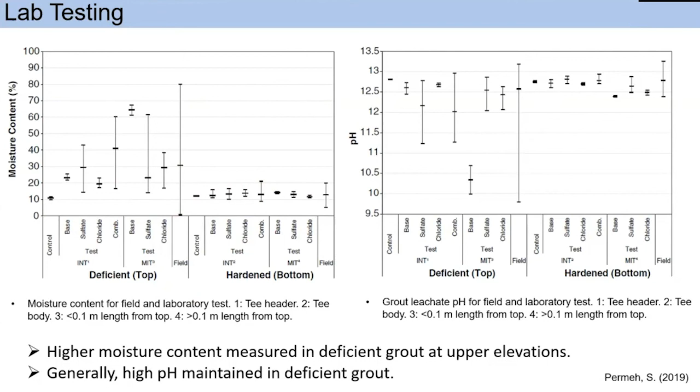Sulfate ion and other chemical species were tested. Grout was collected from the middle of the MIT sample pipe where grout was hardened, and near the high elevation pipe cap where grout was segregated. Elevation of potassium, sodium, and sulfate was observed in the higher portion where grout was segregated. Chloride content remained low. As described by others, the enhanced alkali content may be important in the development of high pore water pH.

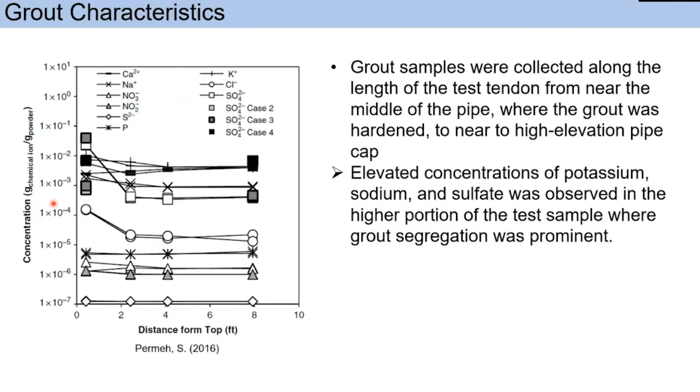It is possible that the transport of water and ions are related to the development of grout deficiencies, in part relating to hydrostatic pressure. These are other related factors in segregated grout: water content - in hardened grout we had 20% water content, in segregated grout it was up to 85%. Grout porosity in hardened grout is nearly 20%, and segregated grout has lower cement content. In these pictures, you can see the wet plastic grout has larger porosity than the hardened grout.